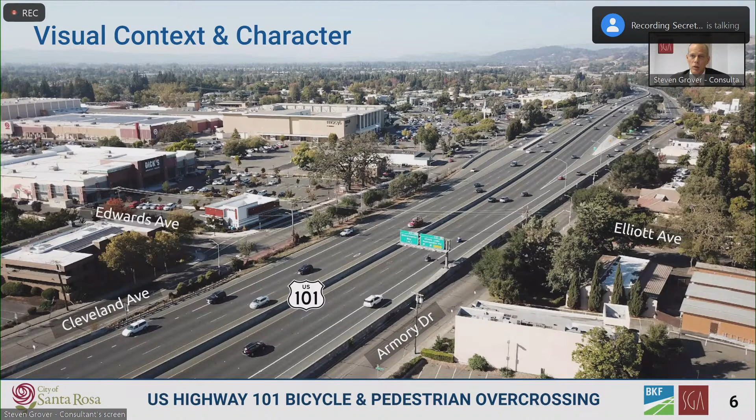The city has designated Highway 101, the Redwood Highway, as a scenic highway. The visual character along northbound US 101 is open, flat, and expansive, with a view of the Shiloh Hills. In the southbound direction, the view is equally open and airy, with trees and greenery flanking both sides of the highway.

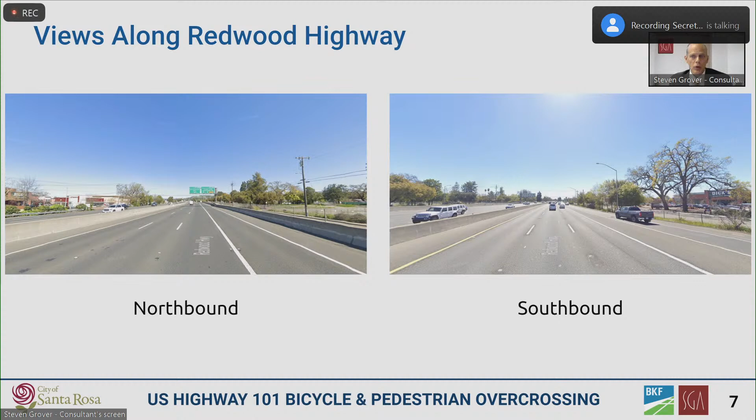At the overcrossing's west touchdown, Edwards Avenue has a quiet, mixed residential character, with some commercial buildings near Cleveland Avenue and single-family and multifamily homes west towards Range Avenue. Key design considerations along Edwards are: 1, compatibility with the existing streetscape character, and 2, maintaining visual and physical access to and from the commercial buildings near Cleveland.

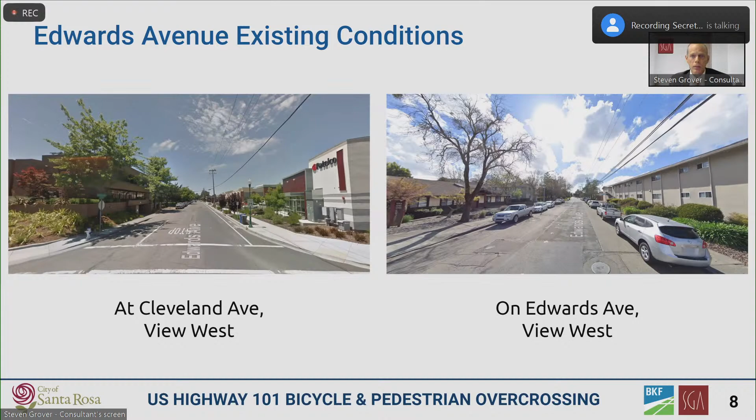On the east side of the highway, Elliott Avenue has a pleasant tree-lined character, with a few single-family homes on the north side and junior college buildings on the south. Design considerations along Elliott include: 1, ensuring that cyclist and pedestrian circulation integrates safely with the circulation within and around the SRJC campus, and 2, minimizing impacts on the heritage trees along the street, such as this large blue oak on the right.

Thus, for both approaches, a key design goal for this project is compatibility with the mixed residential character. In other words, we're trying to avoid bringing the materiality and visual character of the freeway into these neighborhoods.

Now, just a few words about geometric constraints. On the west side, the approach is constrained by its touchdown location and by a vertical clearance requirement at the entrance driveway to Dick's Sporting Goods. To make the west approach work in compliance with ADA, we need 9 ramps at 8.25% slope. On the east side, the vertical clearance at the east edge of the highway controls, but eastward from there, we have a long, gentle slope of less than 5%.

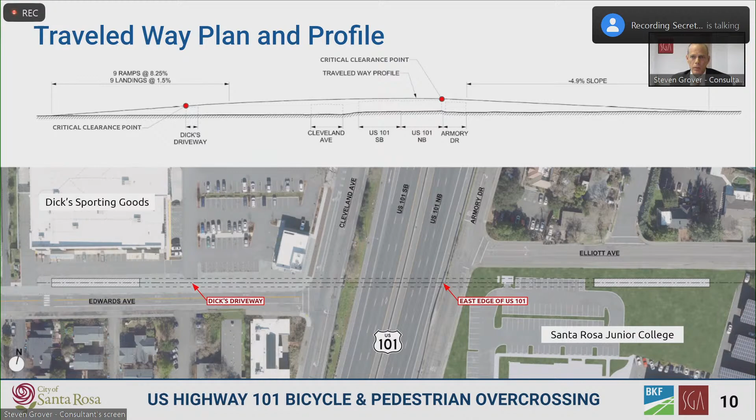In cross-section, the proposed walking path will be slightly raised, just 2 inches higher than the bike path, with an angled mountable curb to separate it from the bike path. This type of separation has been used in other Bay Area bike ped projects, such as this one I designed shown on the right at the Homer Avenue underpass in Palo Alto. This type of curb is common in other parts of the world where cycling is used as a primary mode of transportation.

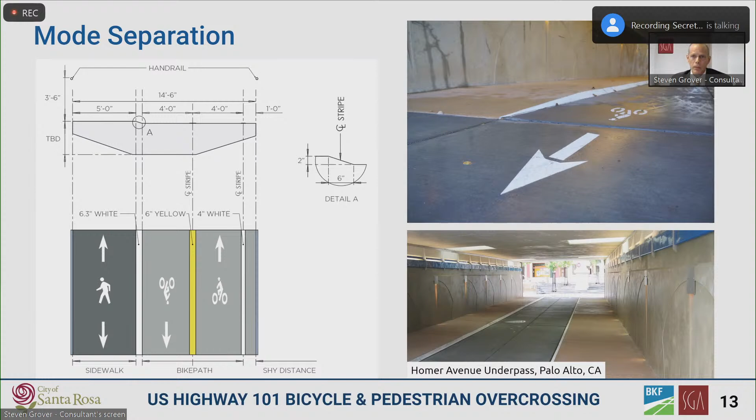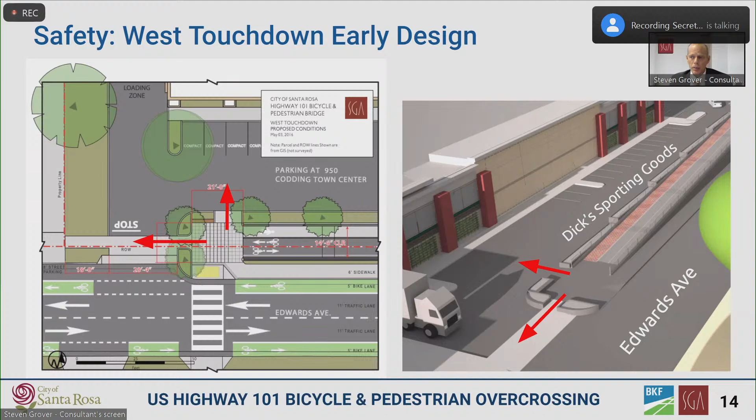Concerns have been expressed in the past by the DRB and others about safety at the west touchdown adjacent to the Dick's loading dock driveway. Here is the design from 2016, which was presented in our previous meeting with the DRB, with a mixing area at the bottom of the ramp. This design allowed for straight ahead travel as well as entering the drive aisle of the parking lot, as shown by the red arrows. We have refined this design to restrict travel, eliminating direct access to the parking lot and the driveway. We have also studied travel mode interactions in this mixing area and added a few other safety features.

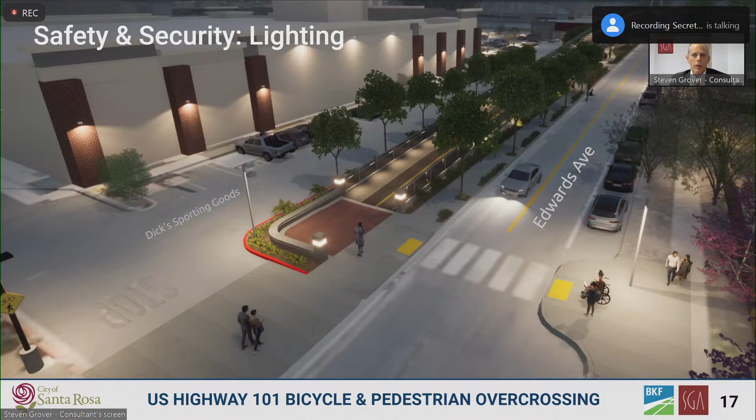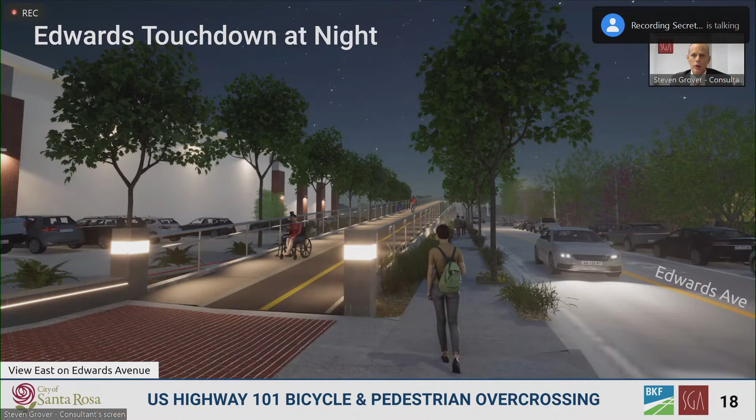Here is a view of that same area at night. An important project goal is to achieve light levels adequately bright for safety and security, yet pleasant, comfortable, and context compatible. In other words, not harshly overlit like a gas station. Here's that same area as seen from ground level.

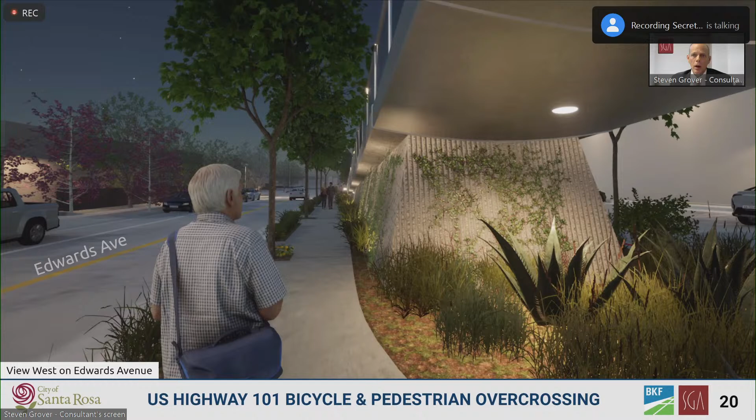Along Edwards Avenue, we are proposing to treat the walls supporting the lower portion of the approach to make them compatible with the context. We are proposing a battered, textured concrete wall. We are also considering vines that require climbing structures, so the extent of their growth is self-limiting and low maintenance. This treatment would also minimize large flat surfaces that could attract graffiti. Here is a view of the same area at night.

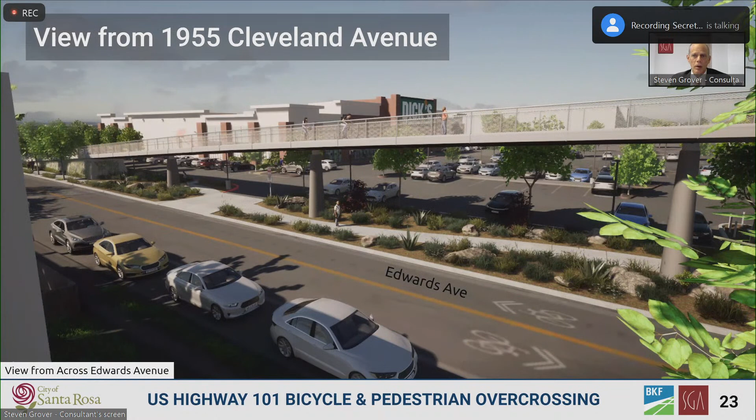Now turning 180 degrees to look eastward along Edwards, we see how the overcrossing passes over the sidewalk. There's an opportunity here to increase the width of the landscaped buffer between the sidewalk and street. Where the approaches are aerial structures, we are proposing soffit lighting rather than standalone fixtures. And here again is the same area, but as seen from the second floor of the commercial building across the street.

Now on the east side of the freeway, the project will connect to Elliott Avenue near the new SRJC student housing. Some at the SRJC have noted increasing interest in walking and biking on campus and asked us to study how to avoid conflicts where multiple paths converge. The SRJC is still working out exactly how the land in this area will be used, so the design you see here will be further refined as we continue to work with the SRJC.

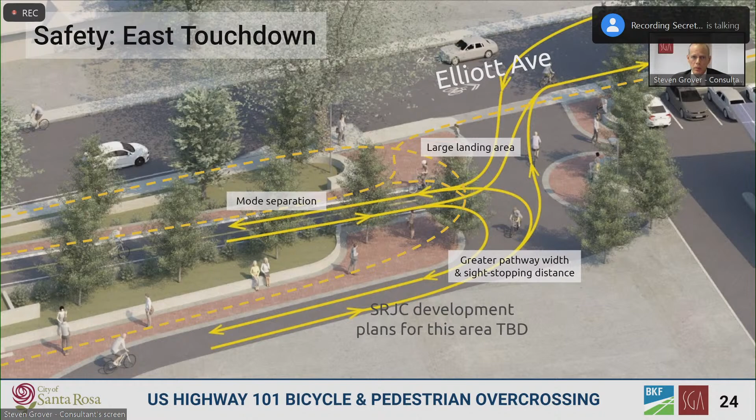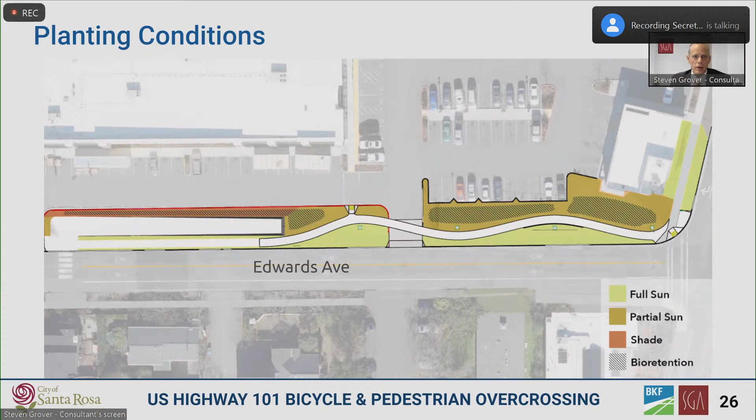Shifting now to the topic of landscaping, the proposed design along Edwards Avenue creates conditions suitable for a variety of different types of plants, those that do well in sun, those that do well in shade, and those that do well in bioretention areas. Here's a preview of our planting concept, mostly using grasses and some large succulents.

With regard to the main span structure, in addition to geometric considerations, there were several factors that informed the design team's recommendation of a cable-stayed bridge type as being the most appropriate structure type for this project. These considerations include visibility of and for users, constructability, minimizing obstruction of the freeway driver's view, and architectural character.

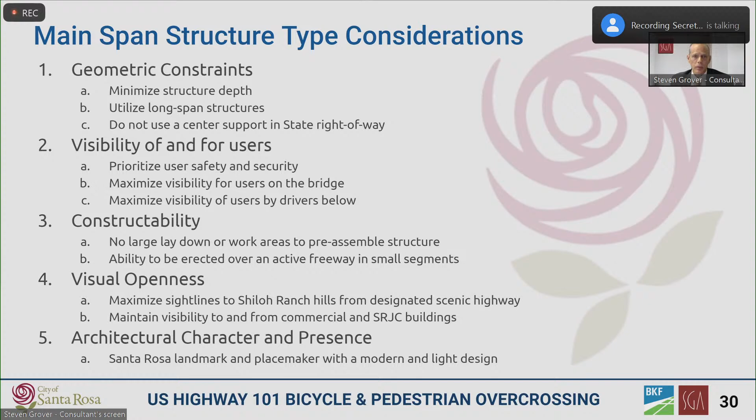In April of 2019, we presented this project to the DRB. At that meeting, we showed you a variety of truss, arch, and sculptural bridge examples. The DRB at that time concurred with our cable-stayed bridge type recommendation and expressed a preference for a unique, light, and airy bridge design, one that would make a modern statement for the city and provide a sense of arrival. To quote Chair Weigel from the 2019 meeting, the bridge should make a statement without signage or artwork because the bridge itself is the artwork.

This direction was consistent with public feedback received for the project since 2009. For example, during the project feasibility study, the community input favored a, quote, signature landmark for Santa Rosa that entices people to use it rather than a visually heavier standard overpass structure. Accordingly, we have been working toward a unique and modern design with clean, simple lines, one that is visually light and open, and one that is easily constructible at this location.

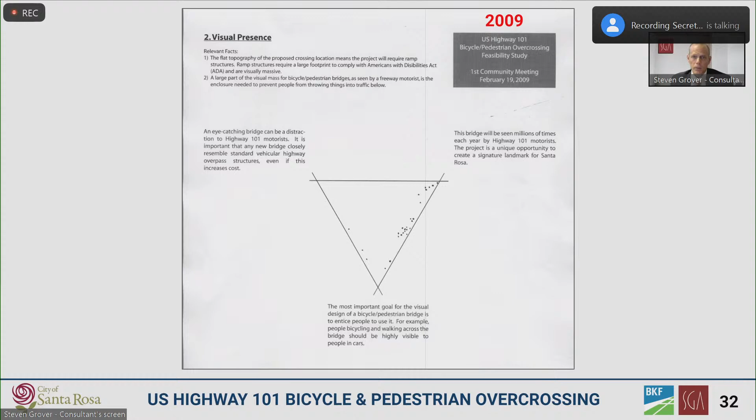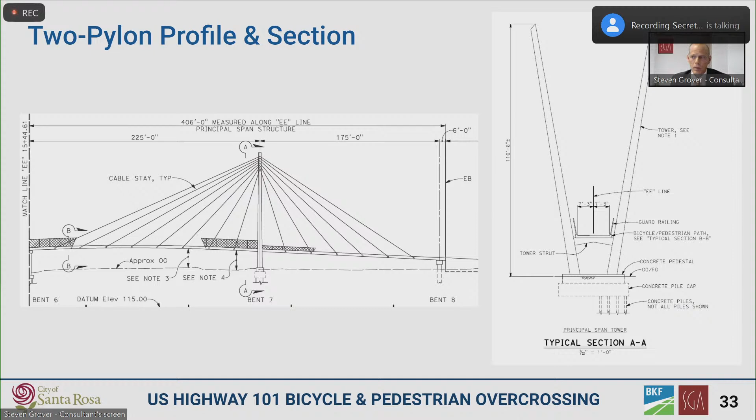Some board members might recall that during the conceptual design phase, we were considering a symmetrical cable-stayed bridge structure type with two towers in a V shape. When we presented that pylon and cable configuration, the DRB directed the design team to, quote, push the design envelope, treat the bridge as artwork, be bold, and to consider a single pylon rather than the rabbit ears V shape.

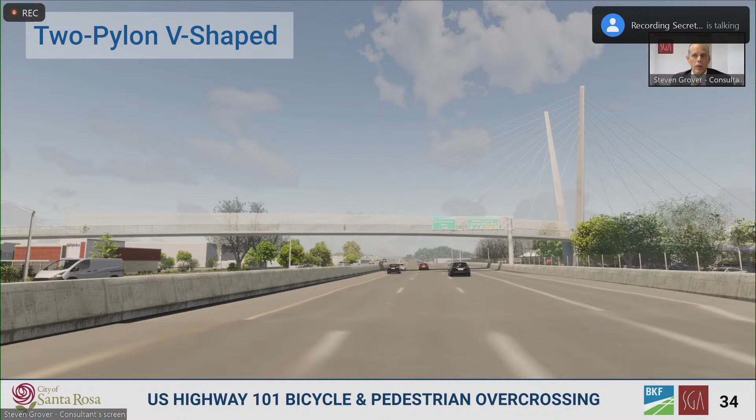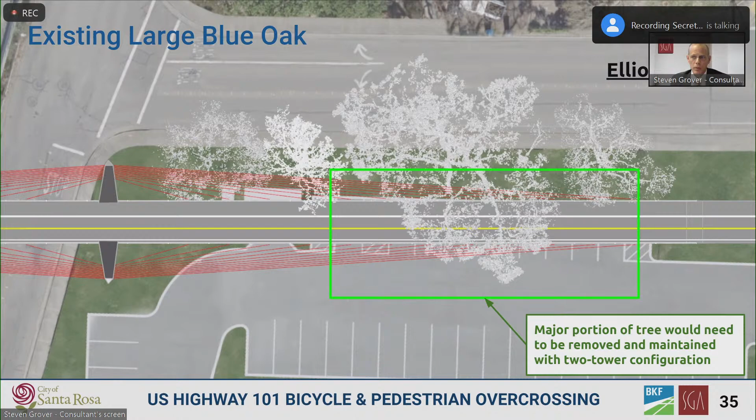During the current detailed design phase, we have had the benefit of LiDAR data for the existing trees along Elliott Avenue. We have found that the arrangement of the backstay cables in a near vertical plane would require cutting nearly half of the canopy off of this heritage oak. According to the project's arborist, this blue oak is especially large and is healthy and has a good form.

Here's that same tree in section. The green box represents the tree trimming that would be needed if the backstays connect to the deck, such as with the two pylon configuration or with a single centered pylon configuration. The blue box represents trimming needed if we use a single offset pylon so that the backstays do not need to attach to the deck.

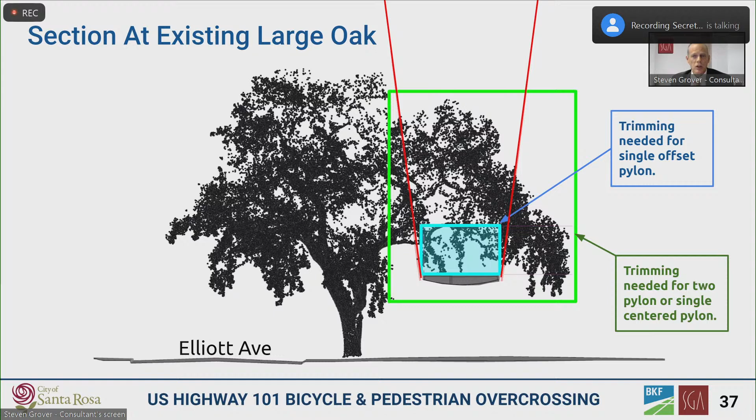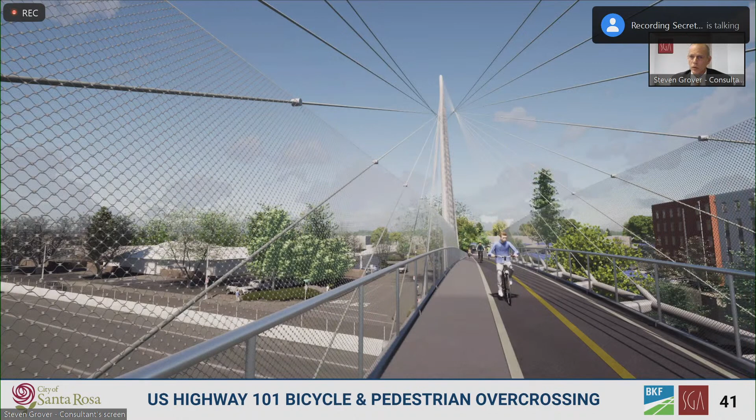Here is the proposed pylon and deck configuration from a westbound user's view. And here from an eastbound user's view. Note that for greater visual transparency and a more open user experience, we are proposing cable mesh instead of standard chain link fencing for the portions of the bridge over the freeway. Here's what cable mesh looks like.

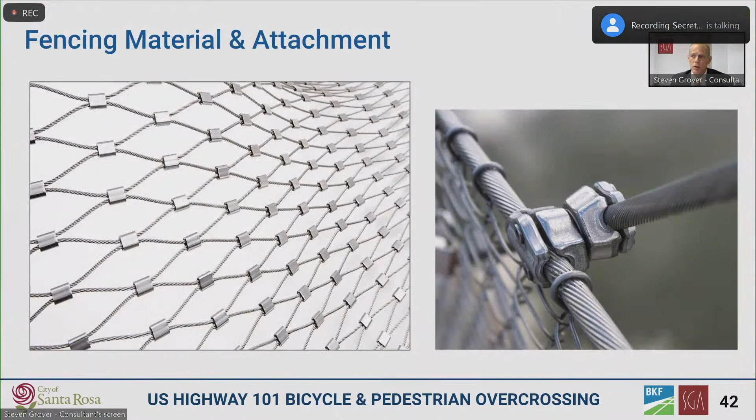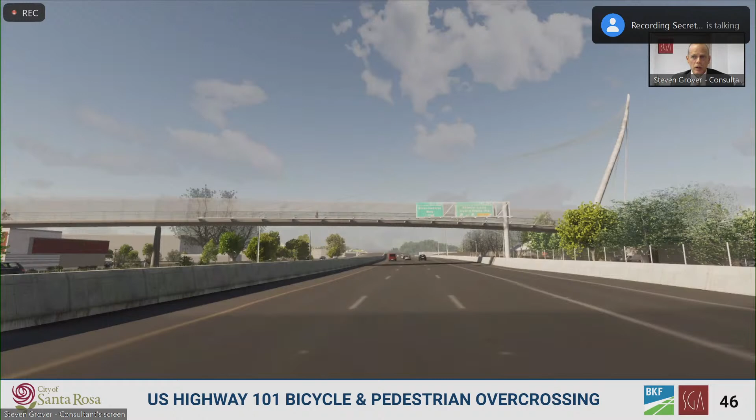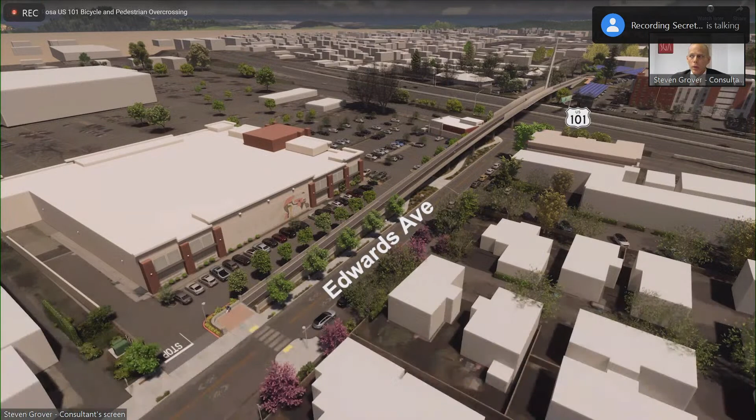We believe this bridge will be a landmark that is unique to Santa Rosa, a placemaker that preserves the views of the hills and of the skyline, and of the surrounding buildings. As a recap, here's a video that will just take you through the various parts of the project. It runs 2.5 minutes.

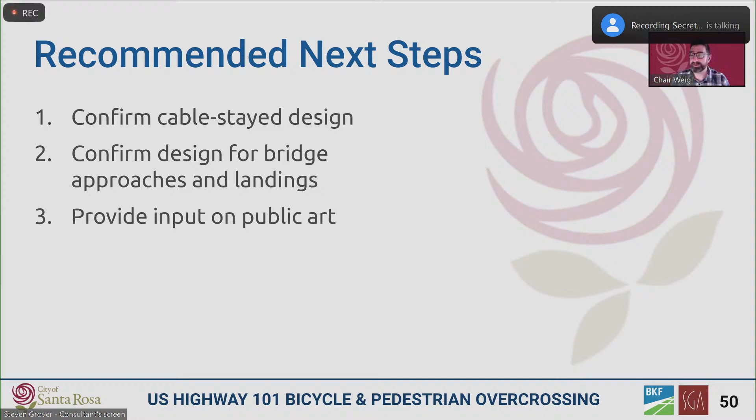And so you'll get acknowledged individually, and Michelle will state your name. Then we'll give you a couple seconds to make sure that we can hear you. And then we'll go into your public comment. And so typically, the board will take notes. I tend to take notes of public comment. The rest of the board does as well, as does staff.

And then we'll bring it back to the board, and the board will ask questions of the applicant and staff about the project. And typically, if there's a public comment that we keep hearing kind of the same thing over and over again, we'll likely ask that of staff and/or the applicant, and then public comment may also key off a question for us as well. So with that, without further ado, we'll go to public comment now. And Michelle, it looks like Steve Soldis is the first one, at least on my screen. So I'll turn it over to you.

Great, thank you so much. Steve, you should have a prompt allowing you to unmute, and if you could please start by stating your name for the record. Yes, thank you for taking my comment. My name is Steve Soldis. My office is 1955 Cleveland. I'm on the corner of Cleveland and Edwards. And as has been mentioned numerous times in comments, I just want to get more comfort.

Bridges attract homeless. We look at every underpass and every bridge around town. It's full of encampments. I know that you're doing your best to prevent this by putting rocks and types of foliage, but over time that foliage goes away, or the landscape can wear out or go away. But more importantly is underneath the bridge, I didn't realize there was going to be a sidewalk. What is the city going to do to prevent that from becoming a homeless encampment, because it's underneath and it will protect them from the weather?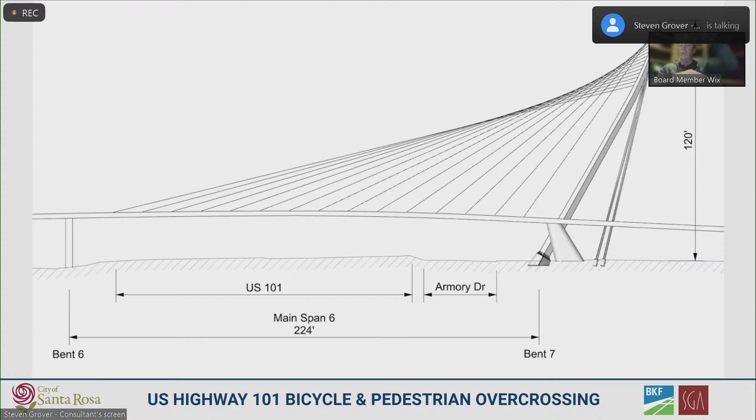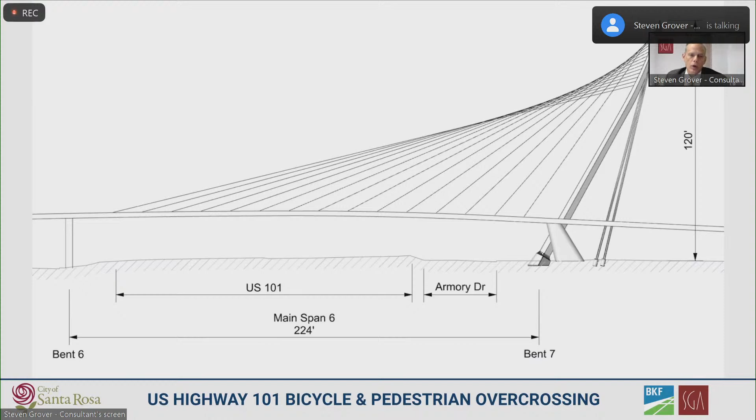The secondary one, as it goes over the highway, I imagine that's a Caltrans requirement, where the guard railing goes from, say, 42 inches high above the walking deck to how high? So there are two types of approved, quote, missile-proof fencing configurations. One is 8 feet high with it curving over your head, or 10 feet high if it's flat. And we're recommending the latter solution with as visually open material as possible.

Right, and I noticed you've got a very inventive way of attaching that cable mesh to the cable supports of the bridge, where there's some sort of a turnbuckle that helps support the cable for the top of that 10-foot cable mesh. Am I reading your drawings correctly? Yes, a dual cable clamp that clamps from the hanger cables to the top of the cable mesh, so that we eliminate as much clutter as possible. So, the extent of that 10-foot tall, what did you call it? A missile? Caltrans calls it missile-proof fencing, so people can't throw missiles down onto the freeway.

I learned something new tonight. Okay. So that missile-proof fencing, that starts at each edge of 101? Is that correct? So, is it a certain distance beyond, a little bit, or is it? I'm sure there's some guidelines for it. But here's my question. I'm warming up to the question.

So that 10 feet and that top cable, is there a way, or did you look at potentially taking that 10 feet and bringing it more, following this elegant design, bringing it down to the 42-inch high cable? And I know it would have to go beyond the 101 extents, and then I was thinking maybe even it could be asymmetrical on the Edwards side, where it would mimic the pylon as it went to the Edwards, angled on the Elliott side.

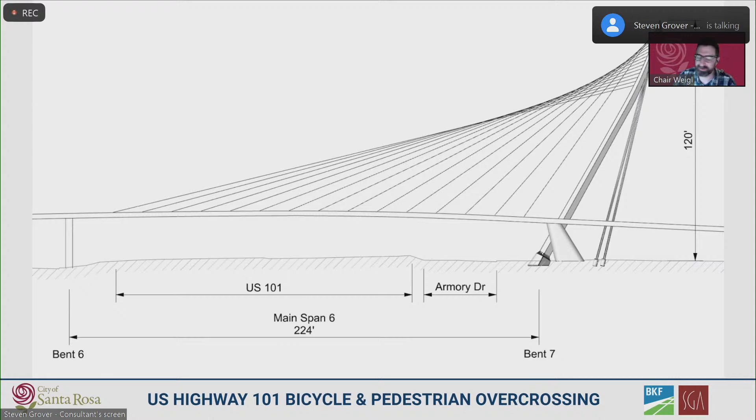I think there was a public comment saying that only one firm has bid on this, and we're not even at the bid process, right? Because there are no construction documents. So really all you guys did was solicit assistance from a manufacturer to generate, if it was this kind of bridge, it's this wide and it would cost this much money. Is that more or less accurate? Yes, that is accurate. We went down that path so we could bring the most accurate cost information available to the board and the public during this meeting.

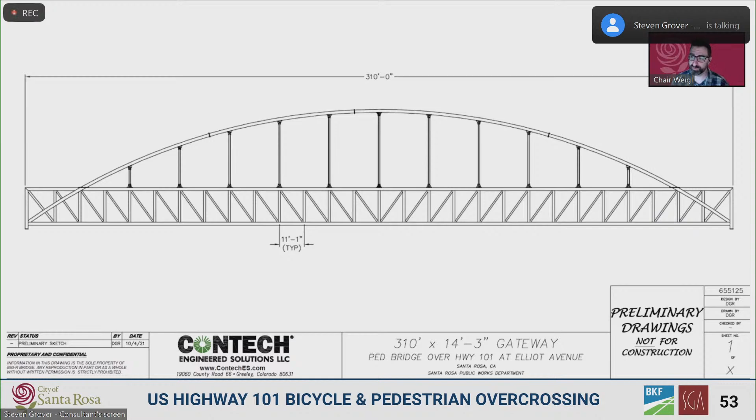Perfect. Thanks, Grover. This is something that we would do as well, in public or private work, as we're trying to cost estimate a project. We're going to talk to our partners and figure out what's the real world cost, so we can sharpen our pencils and figure out the best usage of the project budget. So exactly. Okay, cool. So any other questions from the board at this time? Did anything get stirred while we were asking questions? Okay, so not seeing any other questions, I'd like to go to our comments.

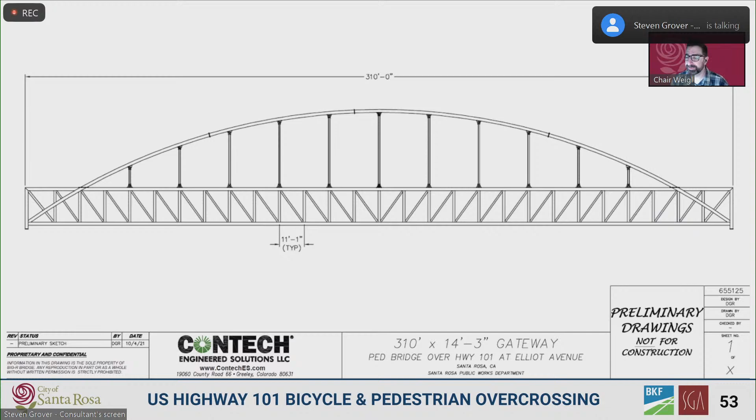I'd like to start with, just to mix it up today, board member Sharon. Well, before we do that, Adam, the applicants asked to confirm the alignment, the pylon design, the overall design concept, and the last one was about public art. Those are the big three things. Yeah, to reiterate, we'd like to receive comments on and confirm the previous direction received from the board from 2019 on the cable stay design, receive comments on the landings at Elliott and Edwards Avenue, and receive input on an art installation or the inclusion of art beyond just the structure itself.

Great, thanks. So does that make sense for everybody? There's three things that we need to say yes or no to, more or less, and then rope in your general comments about the project in addition to that. Go ahead, Henry. Sorry, can I get a clarification on how we're supposed to comment on the art solutions? We didn't see any examples of art either in the pedestrian way or on signage to and from the bridge, on the bridge, across 101.